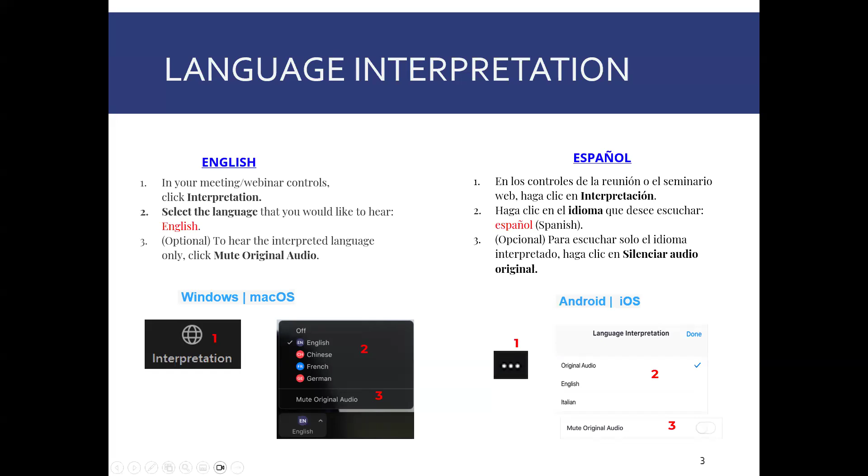First of all, I'd like to thank everybody for attending. We're glad you're here. The purpose of tonight's meeting is to give an update on the 3600 Alameda Street property and answer questions that the community might have. I'd like to be very clear that this is a regulatory agency meeting. Alameda County Environmental Health Department has selected to hold this meeting and will likely be holding others after this.

To make sure that the community's concerns about dust and demolition activities are addressed, we have a lot of agencies represented tonight. We have Alameda County Environmental Health, and Dilan Roe is the chief of Land and Water for that division. Dylan, can you just raise your hand? She's a registered professional engineer in California.

We also have representation from the Regional Water Board, the US EPA, and the City of Oakland. I'm just going to give people a moment to read all of the titles of individuals in attendance here from the regulatory agencies.

We have a short presentation tonight. First, we wanted to discuss how we got here, why we're having this meeting tonight, go over the concerns that we've heard about dust and stormwater, talk about on-site actions that we'll be taking to address those concerns, and then also off-site actions that we have planned.

Okay, very quickly, how we got here. There was a long history for the site. It used to be used as an asphalt refinery. After that, it was a glass manufacturing facility. Prologis bought the property, and as part of that purchase and sale, they assumed responsibility for cleaning up the property to allow future reuse. Environmental investigations were conducted, which is very common with industrial properties.

We found that the soil was contaminated with PCBs, dioxins, furans—Dylan can go into what those are. That's the soil beneath the basement and the buildings. And then also there's metals, petroleum products, chlorinated solvents. You can read the list here in groundwater and soil vapor.

Soil vapor is just the vapors between grains of soil. If you can imagine a sponge and the holes between a sponge, vapors like to congregate there. So that's all that is. Sometimes some of these things like to evaporate and they congregate in these little spaces where soil particles are.

In April, Prologis did receive entitlement, meaning they got the green light from the City of Oakland to redevelop this property into a warehouse. In fall, Prologis began abatement and demolition work.

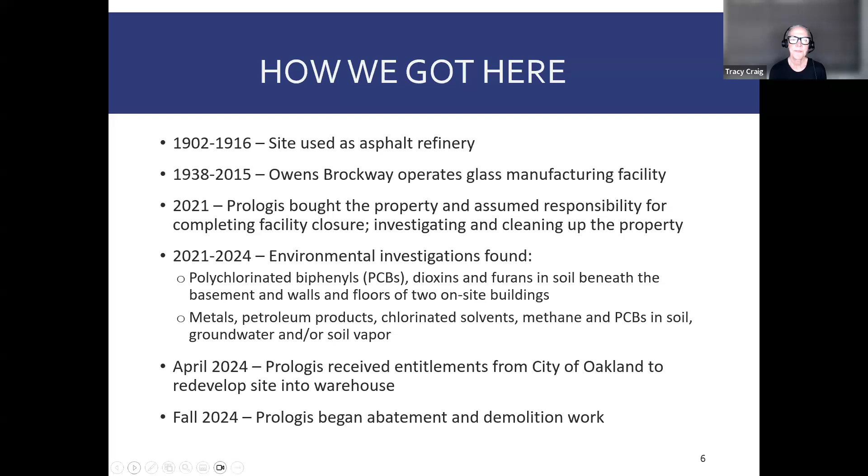In March, a community member called me and notified me of dust concerns associated with the stockpiles, which were quite high at that time. On March 12th, Dilan Roe, chief of Alameda Environmental Health, and I went out and visited the site.

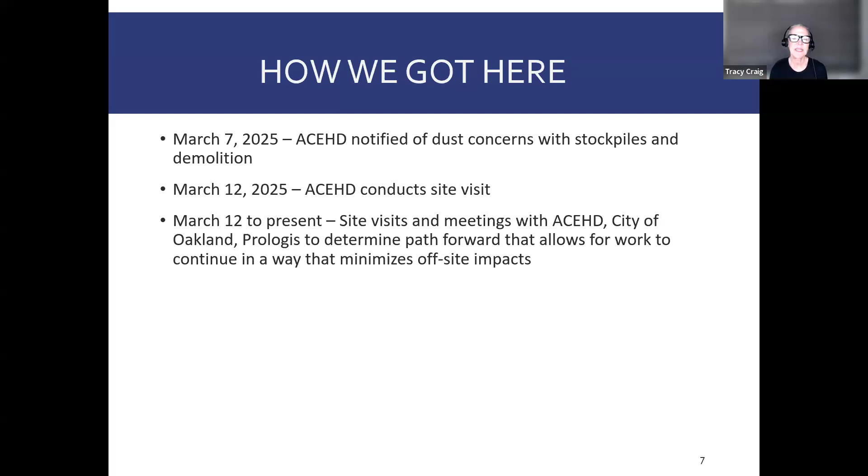Since that time, there's been a lot of coordination led by Dylan with all of the agencies you saw, to improve site conditions, to minimize offsite impacts, and to figure out what, if anything, has gone offsite and how we need to deal with that. And that's why we're here tonight.

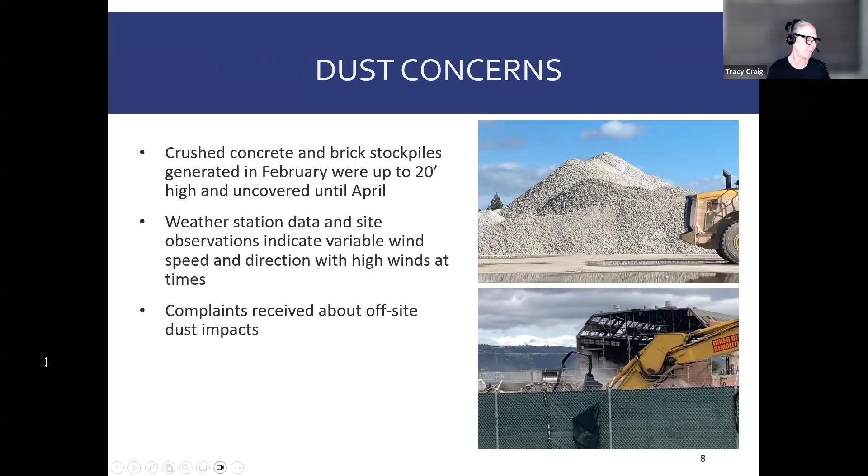Okay, go to the next slide, John. In February—I don't actually know, this is information we've been given—but Prologis indicated that they had been applying water to the stockpiles Monday through Friday, and that they added an additional air monitoring station. There are perimeter air monitoring stations around the property to evaluate the levels of dust that blow across the site, so they had added an additional station. This was before we understood about the complaints, and you had already been having discussions with Prologis.

In March, we got the complaint, and Environmental Health went out there. We directed Prologis to collect samples from the stockpiles. Samples had been collected from the uncrushed concrete prior to crushing that did not indicate there were contaminants of concern. But when the crushed concrete stockpiles were sampled, there are contaminants of concern, and we'll talk about those in a minute.

So in March, they collected samples. They began—I think this is probably when they really began—applying water to stockpiles Monday through Sunday; they extended the dates on which they were applying water. I'm not sure how, and these are some questions we can ask at the end, whether it was through water trucks or water cannons. And then they added additional monitoring stations at our request because the monitoring stations were too far apart.

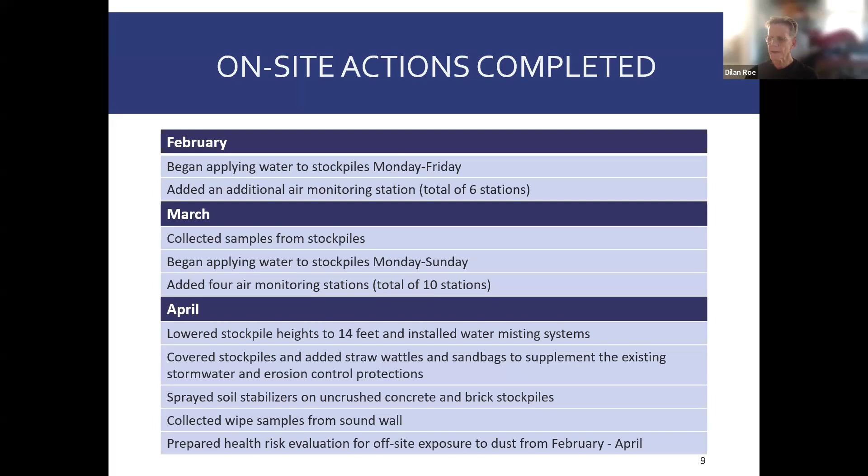While we were asking Prologis to prepare an offsite sampling work plan, we also asked for a human health risk evaluation to be prepared, including the data from offsite sampling that is pending on some of the properties and the characterization of the stockpiles. A draft has been submitted to us without that data, and we have commented that it needs to be updated with the additional data that is going to be collected.

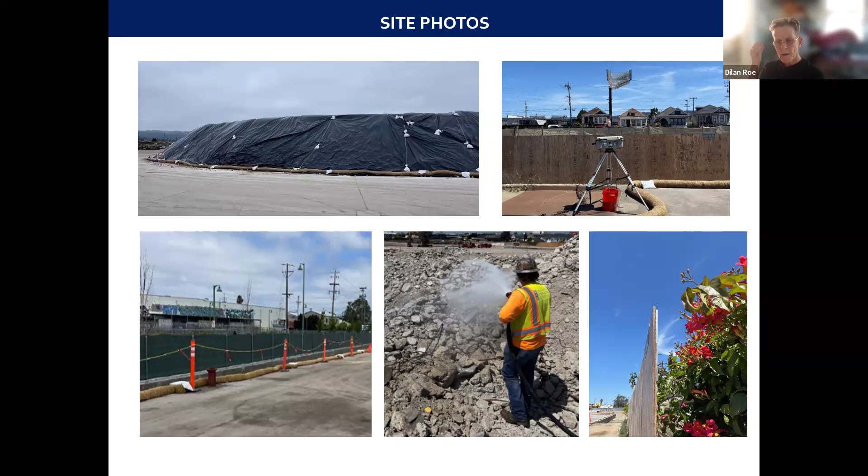So there's been a lot of analysis going on with these stockpiles to try to understand what's in them, what the maximum concentrations are, what chemicals of concern are in the stockpiles, and what we might be seeing in some of the dust or stormwater that potentially has migrated off the site. This is just an example - it's a picture of these 2 giant stockpiles, or 3 stockpiles.

The way stockpiles are sampled is you collect a whole bunch of little samples, and then you mix them up into what are called composite samples. So there's a whole lot of sampling data that is being evaluated right now. But what is true is there are PCBs, petroleums, semi-volatile organic compounds, and lead above residential screening levels in these stockpiles.

There is currently a document about additional analysis and rationale for whether the sampling we have now and the results are adequate, and that is under review by all agencies right now. But there will be some additional sampling of the stockpiles conducted.

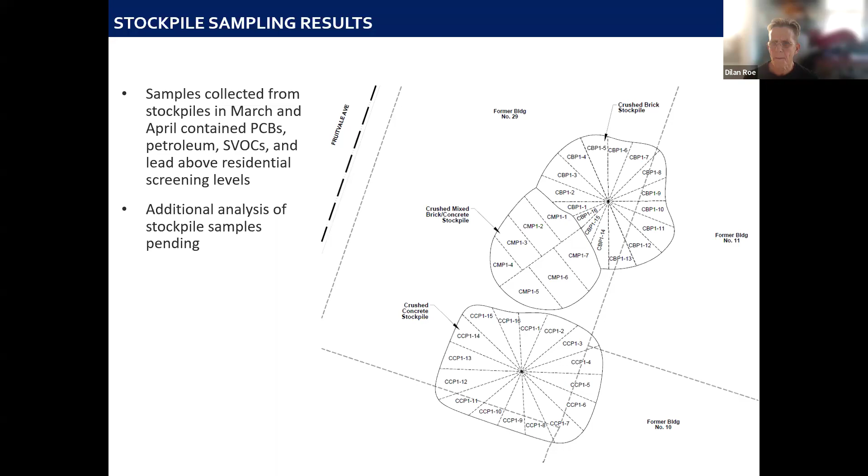The wipe samples were collected on the top of that 1-inch board at about 4 feet height. 6 out of the 23 samples contain lead above EPA dust clearance levels. No PCBs were detected, and both environmental health and the US EPA consider these qualitative at best. They give some indication of what might have blown across at 4 feet and landed on a very small surface. So we are going to be requiring, and we are going to be conducting, some additional off-site sampling.

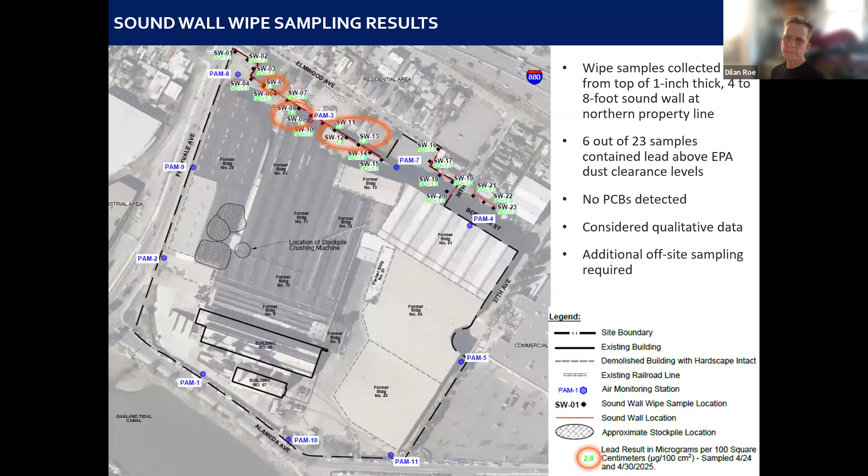So there's additional on-site sampling and activities. All these agencies are involved in figuring out what they are right now. We're going to continue evaluating the stockpile samples to understand the representative concentrations of contaminants. There will also be collection of stormwater samples and assessment of potential impacts.

Prologis is going to be preparing a plan and a pilot test if they want to continue to crush concrete on the site, to show how that can be done safely with appropriate dust controls, so that we don't have a similar issue going on in the future.

There will be a perimeter windscreen installed around the site. I have a document that proposes maybe a 16 or 20 foot tall fence. But I've been told that Prologis is considering making a fence out of shipping containers. That's something we can ask Prologis about tonight—to be determined what's going to happen there.

The intent of having that is so there are better controls to help prevent the offsite migration and the impacts to the adjacent residences on this property.

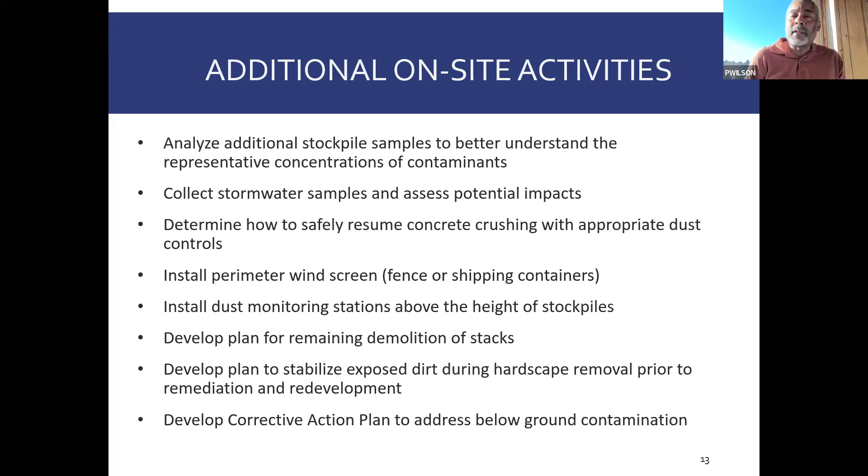So I'll stop there because I can't say it much better than Dilan did. But if you'd like a much more in-depth conversation about the adverse health effects we at the federal level associate with PCBs or lead, we can make that happen. I'm not sure this is the best venue, but we can make that happen. I'm going to turn it back over to Tracy.

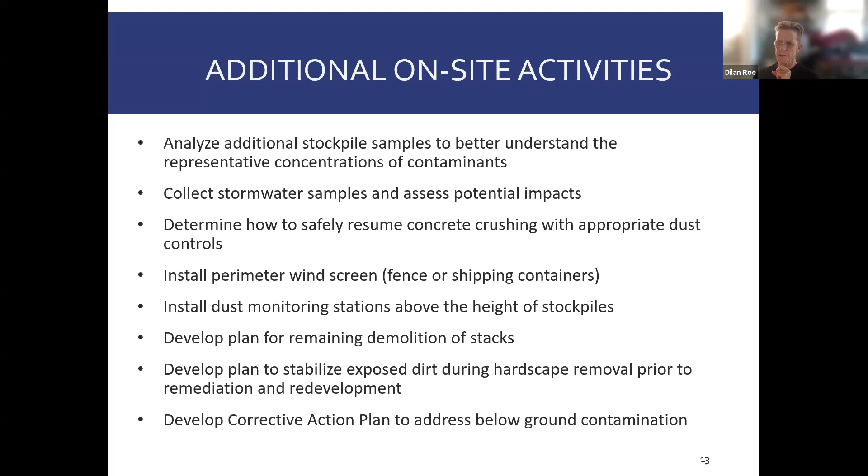I'll go a little bit into detail: removal of contamination that poses a potential groundwater impact, and then removal of soil that will be required to develop the site. The site is going to be developed with a giant warehouse that has been entitled by the city of Oakland. So there's a lot of plans that need to be submitted to the agencies prior to moving forward beyond just this vertical demolition. Next slide.

So the offsite assessment—probably most of you are interested in this, and Dana and Rebecca were just talking about this. One of the ways we're going to start understanding impacts is by collecting samples from some offsite properties immediately adjacent to the site. The sampling was going to be conducted... was that?

May 28th? Weren't we going to do that a week ago? We were going to do that, but we were going to do it this week. But then they didn't have the right equipment because you wanted a different type of sample. Yeah, so the offsite sampling has been delayed a couple of times. One, because I had a death in my family. I was not in town.

And I'm going to be at the properties when the samples are collected. Then we had a further delay when a lot of the agencies were talking this week, trying to understand everybody's needs and data assessment, and making sure we were collecting all the data and methods so that we could compare apples to apples. Prologis' consultants are currently preparing a revised work plan to address the comments. They will be submitting that shortly, and then offsite sampling will occur sometime in June.

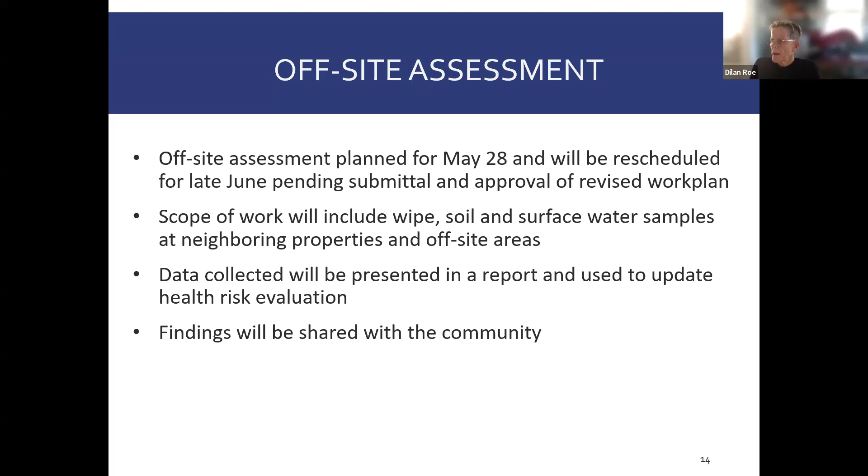And then when that data is collected, those findings will be shared with the community. They'll also be used to update the human health risk assessment so we can talk to you, Dana and Rebecca, and everybody else, about the exposures we're talking about here and give you more information. Next slide.

Stormwater is another big concern—the impacts to stormwater from contamination at the site, not just from stormwater that was in contact with crushed concrete or other demolition debris and then moved off the site, but also from dust migration that has gone offsite and then deposited in areas where stormwater would pick it up.

So Regional Water Board, City of Oakland, Environmental Health, EPA—we are all looking at documents. There have been two documents submitted so far that are being commented on, and we're requesting revised plans. One is called a stormwater pollution prevention plan, which covers all the controls at the site to make sure stormwater doesn't move off the site, including a sampling plan. Then there's a different kind of sampling plan evaluating impacts to the Oakland Tidal Canal and the surrounding community—collecting stormwater samples or sediment samples, since there's no stormwater right now, sediment samples in stormwater pathways for analysis. So revised plans are required to be submitted.

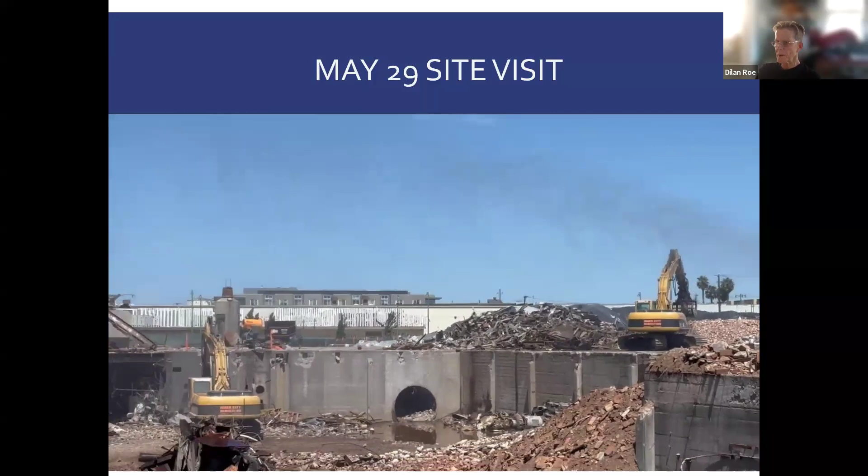If you look to the next slide, John—this is a short video. What I want you to notice, because when I first came across it I thought I was seeing dust, is that it was not dust—it's mist coming from that water cannon. So the dust was being controlled well in this moment, but again this is a moment in time, and we expect dust to be controlled all the time.

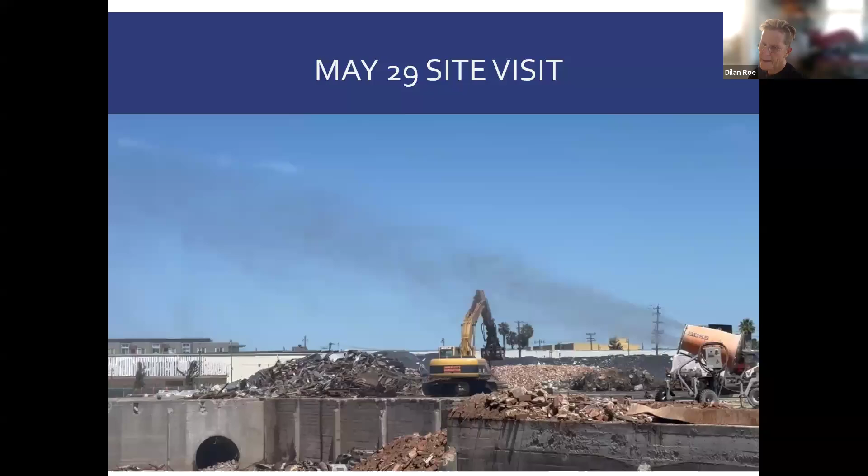So we want to continue to hear about your observations. But Prologis and their contractors have done considerable work to correct deficiencies and stabilize the site, and there is going to be more work done to continue that. Next slide, please.

A really important piece is the site characterization report. There have been a large number of samples of soil, groundwater, and soil vapor collected at this site, and we are waiting for a site characterization report that will be submitted in a couple of weeks. That's going to really help inform what's in the ground, what the measures are going to be for remediation and for management during redevelopment to ensure that the community is not exposed to those contaminants when soil starts being excavated.

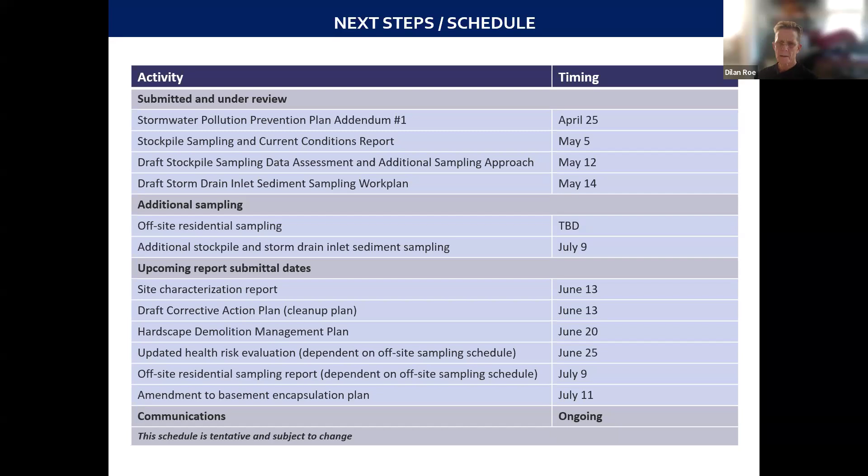Okay, I'm going to turn it over to Tracy.

Sure, thank you. John, if you can just go back really quickly, I just want to stress one thing. The last line there is communications, and so we're going to redouble our efforts to make sure the community knows from a regulatory perspective what's going on. Dilan mentioned a couple of events that the community would be interested in - taking down those stacks, the ultimate cleanup plan for the property - and we do have public engagement milestones around those, and we also expect that we'll continue to have virtual meetings to update you as we get new data. So just wanted to say that.